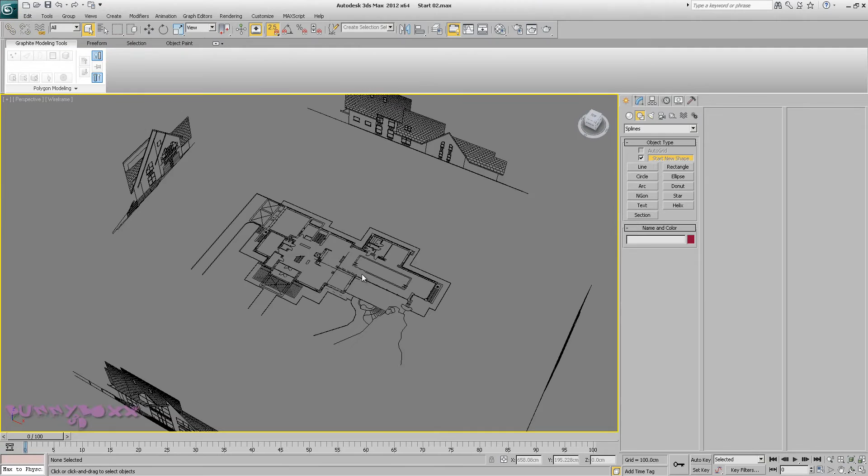So what we're going to do is go to the top view, and we're going to work through this in particular sections so we don't get too overwhelmed. I think we'll start down here, do the outside of this, and take it from there.

So we want to go to the line tool, making sure we have corner selected for both the initial type and the drag type, and we want 2.5 in the snaps toggle. How I do this is click and hold and select which one you want, making sure we have vertex selected.

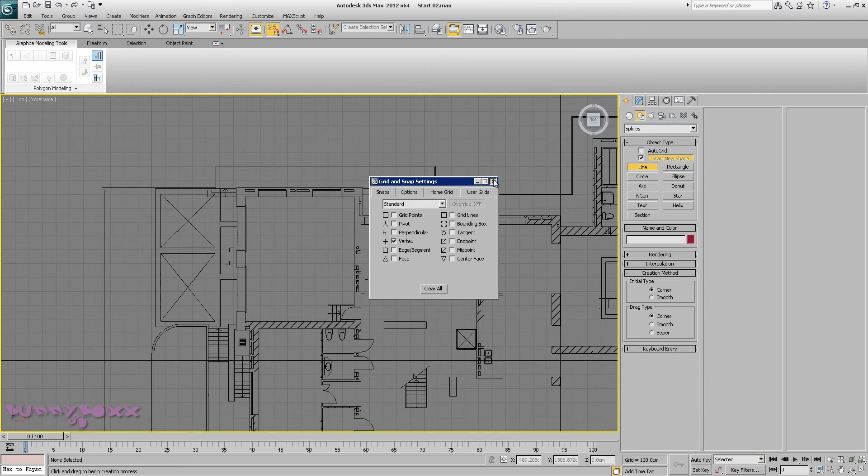Press S to turn on snaps, and we'll get this guy right on the end there to there. Now press the I key to center your view on your icon, and we'll go to here and across to here.

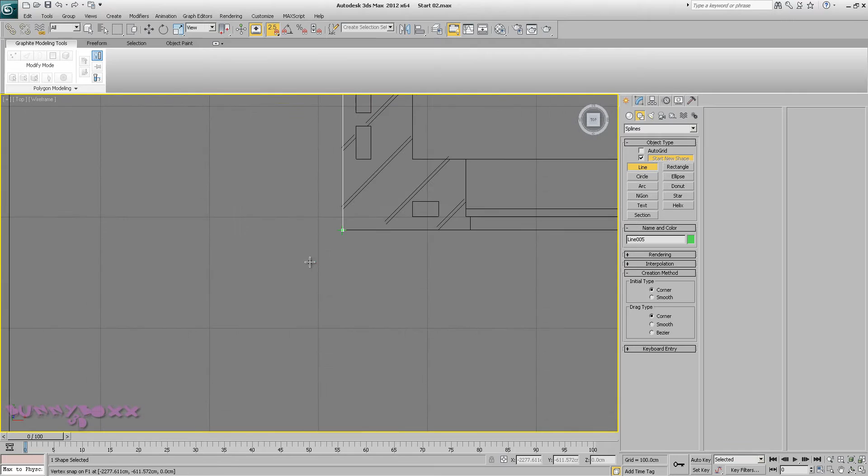Oops, I pressed the wrong button there. That's fine, we can just attach these as we go.

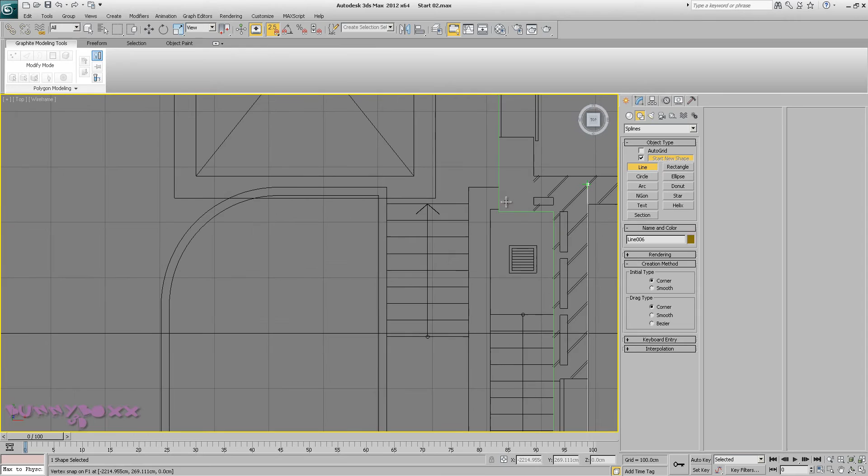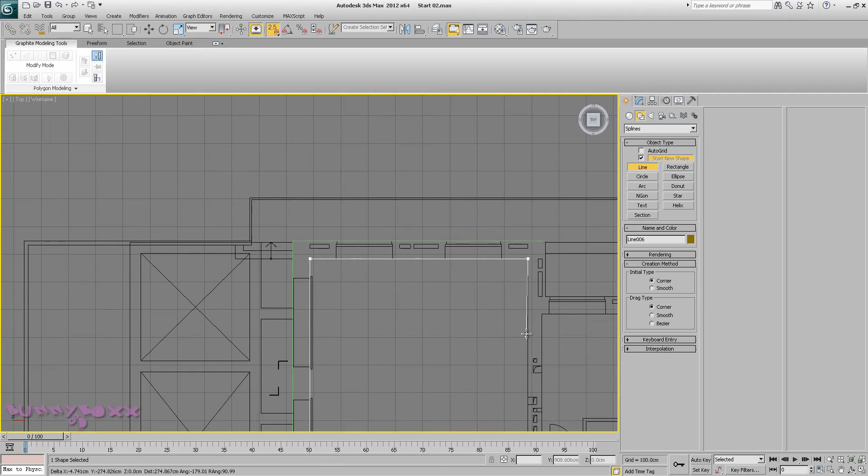Now this guy here, hold down shift and we'll just drag up to this point and snap to here, and snap to here, and hold down shift so we get a down direction, and we'll snap to this point, and snap to this point, and finally we'll go all the way to the top.

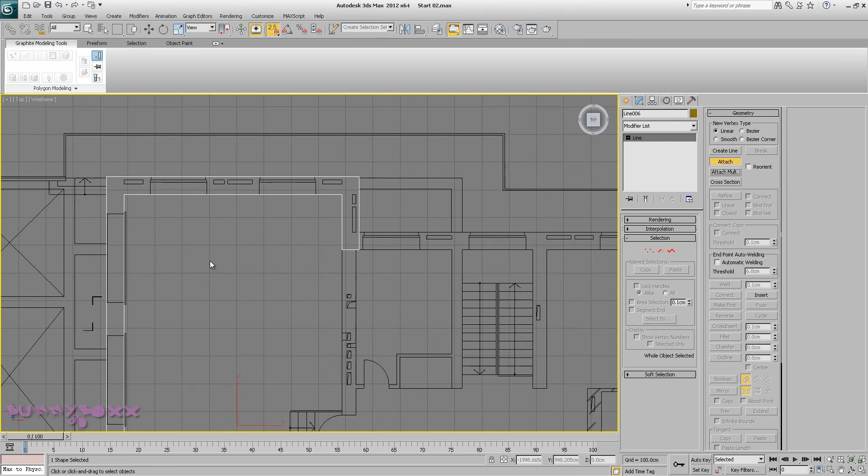Right click, and I just want to attach - attach multi - and we want line 5, and attach. We'll go into vert mode here, and looking at this, I'm just going to bring these guys up to here with my snap still turned on, and just double checking.

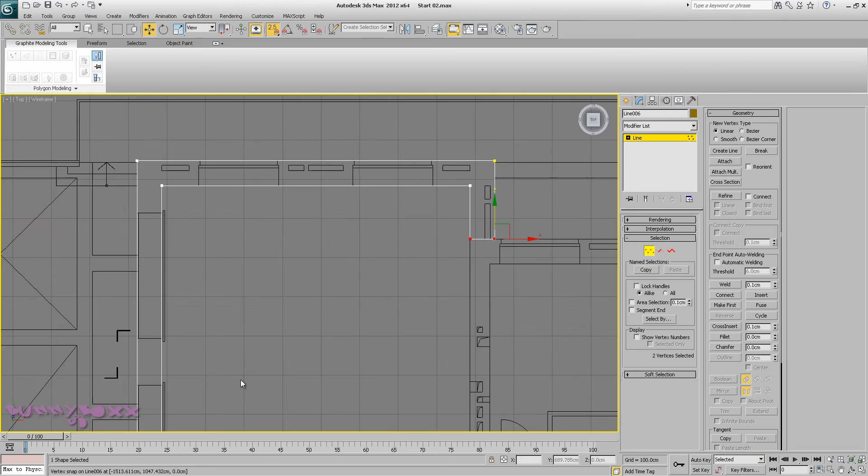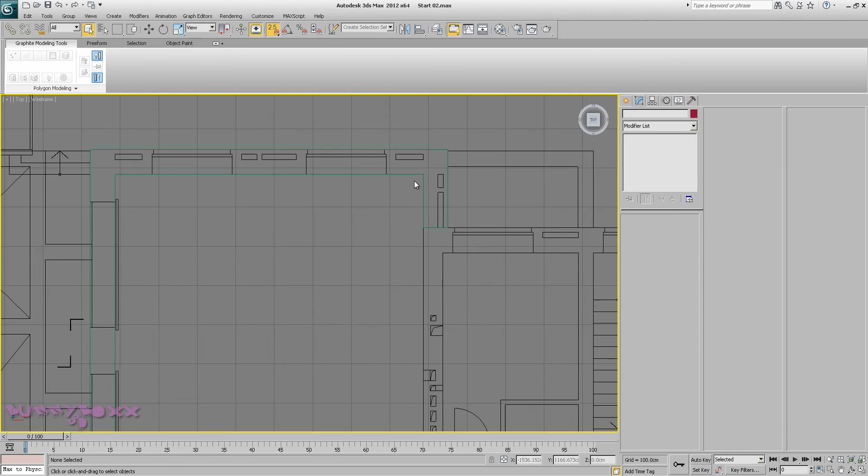Okay, now I just want to change the colour of this to a green, so it's easier to see.

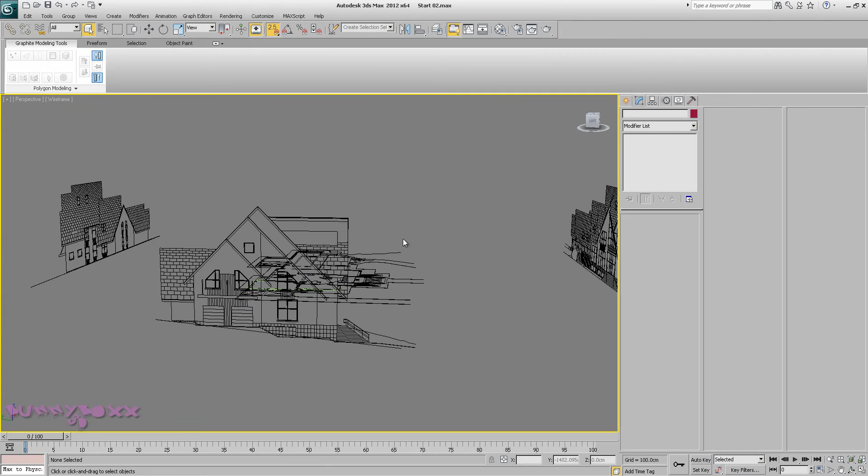And I want to go to perspective view, and what we want to do is hide this elevation view, and we'll go to the left. Okay, let's make sure we have our thing selected first - line 6.

Going to left view, and we want to add the extrude modifier, and match this with the highest point.

So I think if we go to the front, let's hide this guy, and we'll go to the front and bring this all the way up. It doesn't have to be perfect at this moment in time, so we'll just bring it slightly above.

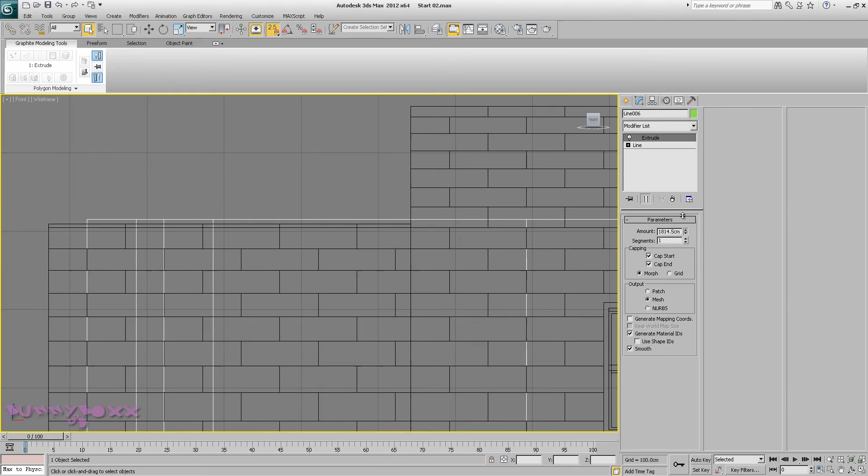And let's go shaded. I'm going to change this colour because that's better.

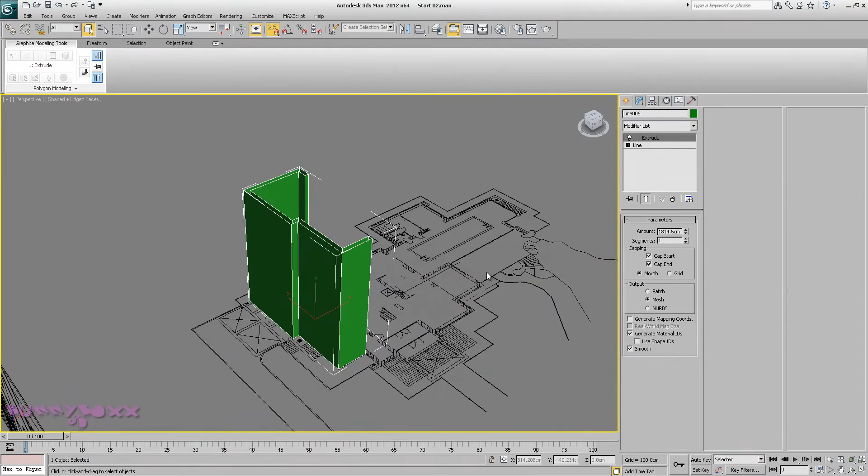So we'll go to our left view and let's turn on a wireframe. We want to slice this guy now, so make sure you have him selected, and we're going to go to the slice modifier. We're going to be using a lot of modifiers, I think, in this project.

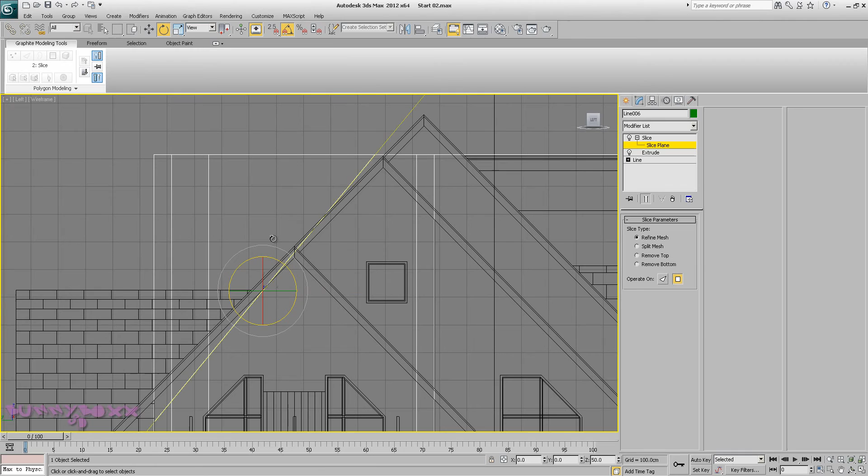So we'll select the slice plane, and we can bring up and move this any way we want to. Let's move this guy around about here. We want to rotate, so we'll angle snap, and bring that guy across here, like so.

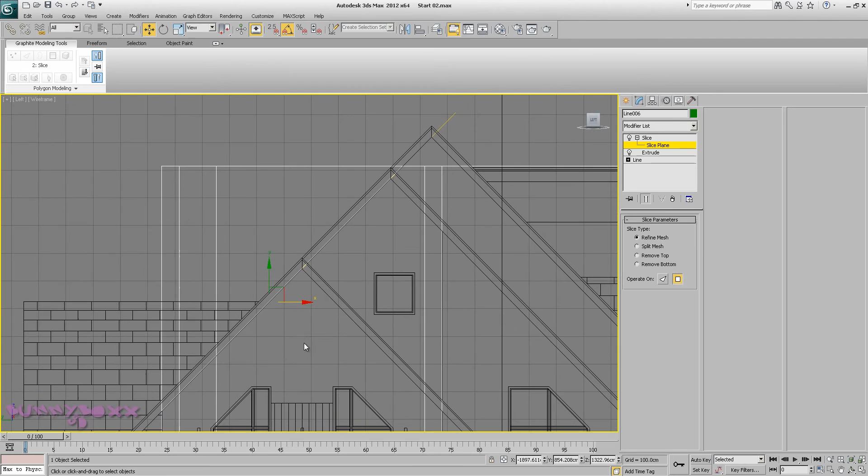And we'll select remove from the top, and it automatically cuts off the top there. So we want to copy and paste.

Making sure it's on top, press 1 to activate it, and we're just going to rotate - let's undo that, rotate first. Rotate another 90 degrees, and we just want to bring this across to, let's see, okay, perspective view, let's check this and go to shaded.

Okay, perfect, and we can convert this to editable poly. Let's have a look at this colour. Okay, let's close this bad boy up.

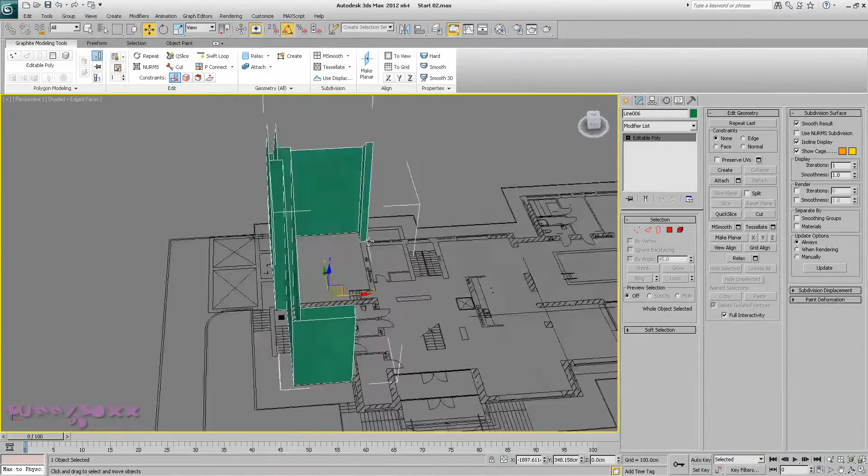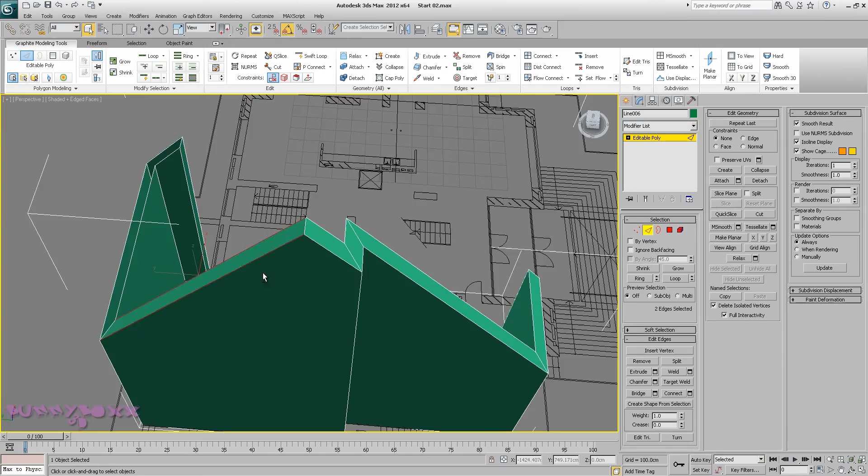So if we click on edge, let's select this guy and this guy and bridge. And bridge, bridge - you can also right click. Well, I did have it in my menu icon there, but I guess not. Bridge. And bridge.

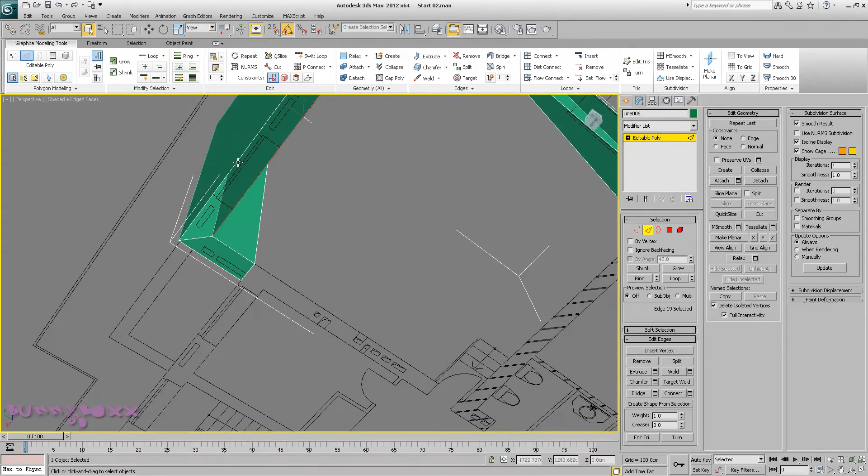Okay, looks like we need to do the bottom. Dun, dun, dun. Alright, this guy, this guy, and this guy. Okay, so that is nice and closed.

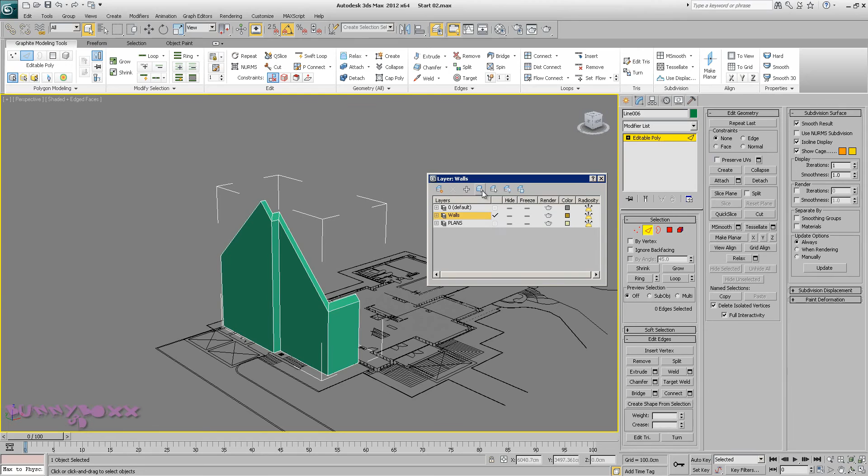So let's manage our layers here for a quick second. I think we'll create a new layer, and this one we shall call walls, and add selected objects to the highlighted layer. Okay, so let's make sure this is selected, and we'll close that off.

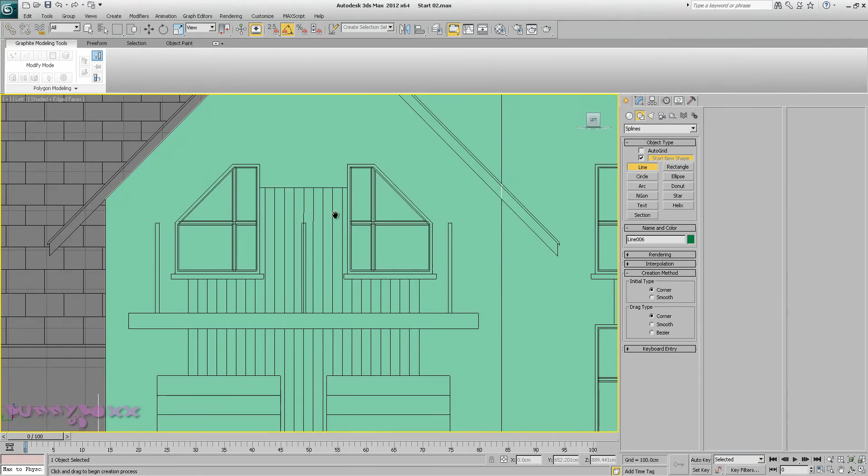And if we go to the left view, let's cut the holes from the windows. So what we're going to do is create the line tool and turn on our snaps. 2.5 is still good.

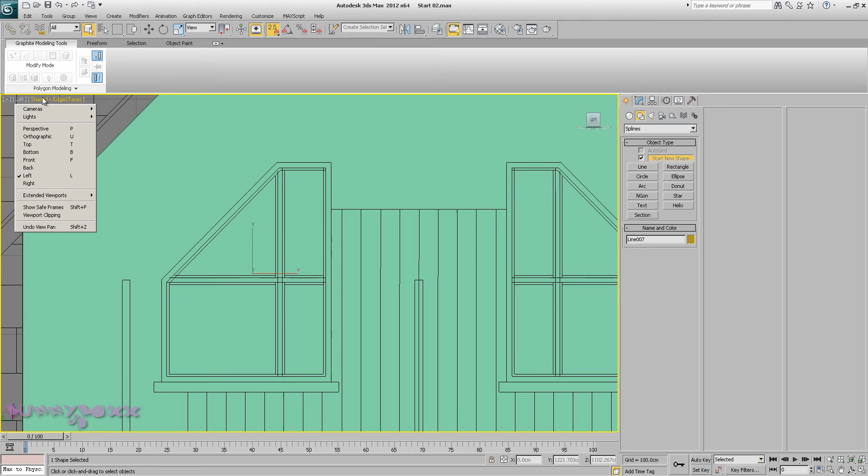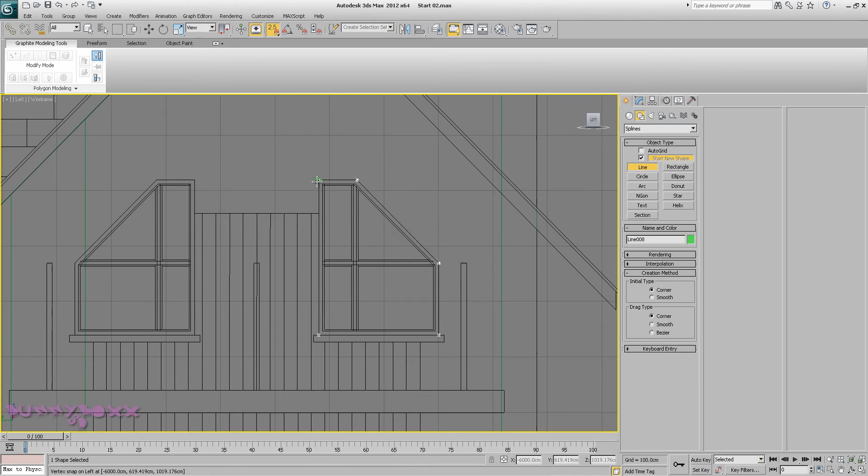So left, let's just put on a wireframe here, and we'll go over to here. Close that guy, and we'll do the garage doors. Yes. Okay, I'll right click to end the tool, perspective view.

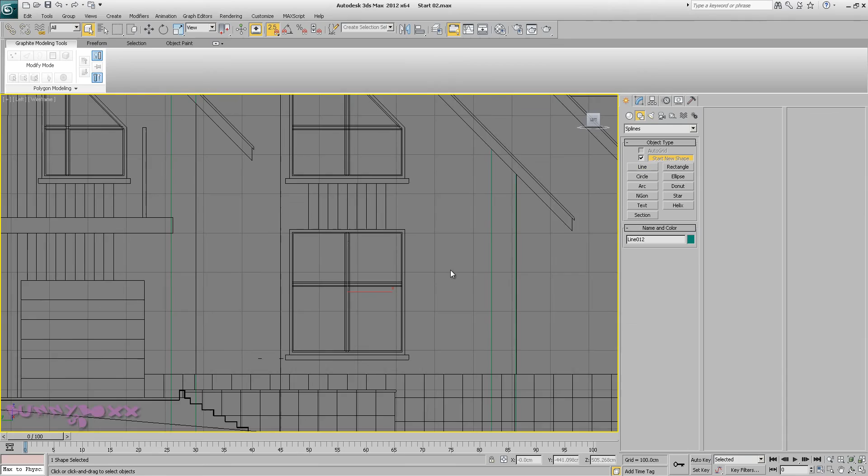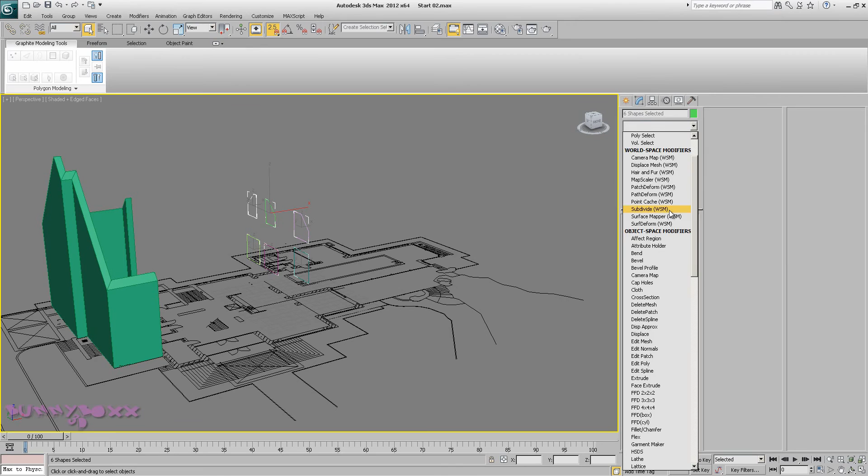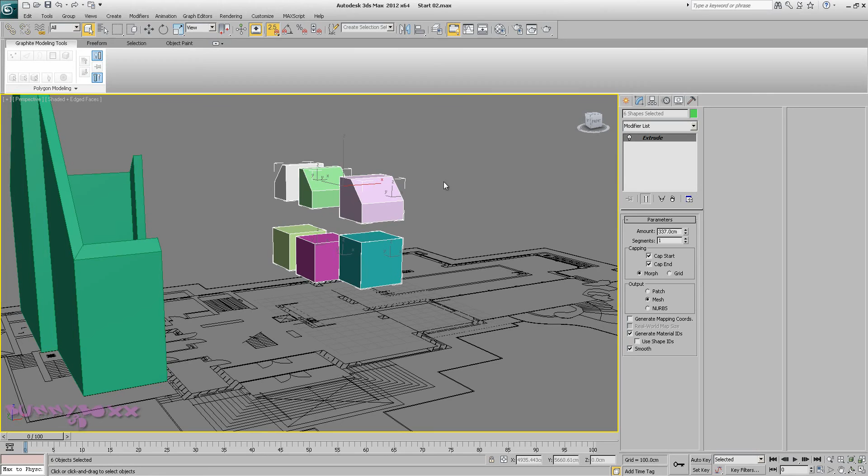I'm going to shade it here, and we'll select all those guys, and go to our modifier list and the extrude modifier. So I'm just going to reduce these - you can go faster by holding down Control. And there we go, just select these. There we go, I want to make this blue as well.

There we go, and we'll just bring these across. Turn off your snaps tool.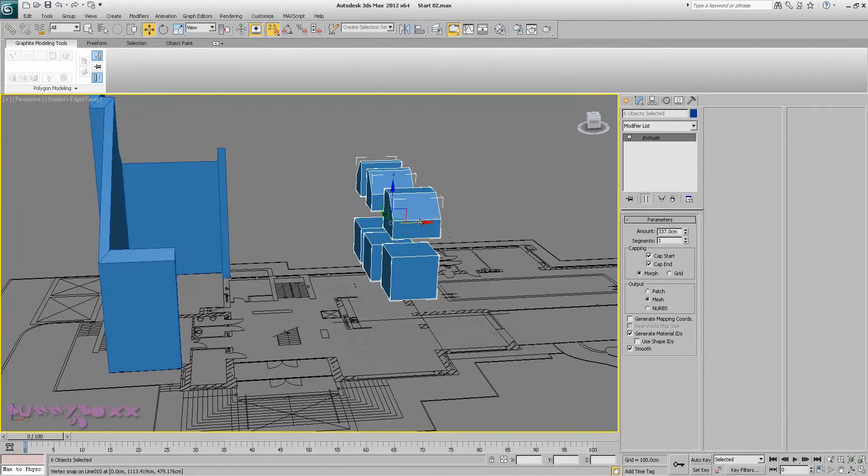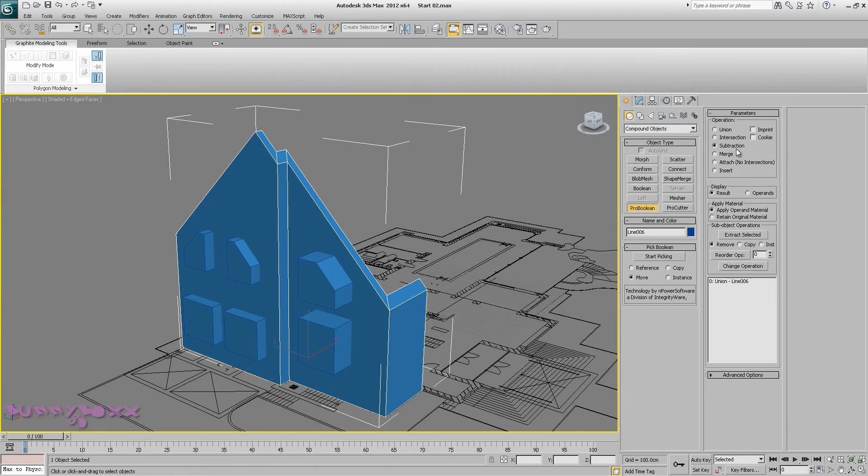Okay, so now, making sure we have the wall selected, and making sure that these objects we just created are poking through both ends, we'll go to the Create tab, down to Compound Objects, and select Pro Boolean. We want Subtraction, click Start Picking, and select each one of these, then right click to end the tool.

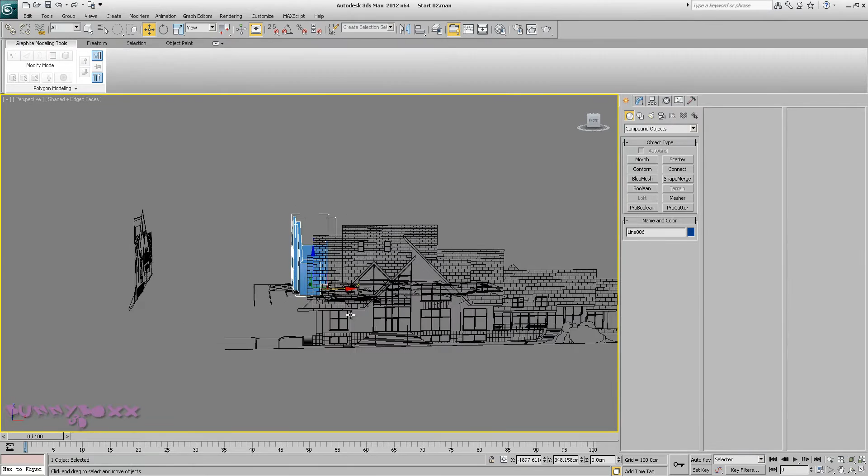And we have our windows, and if I'm not mistaken we have a window at the front here. So go to the front view, just checking something here for a second.

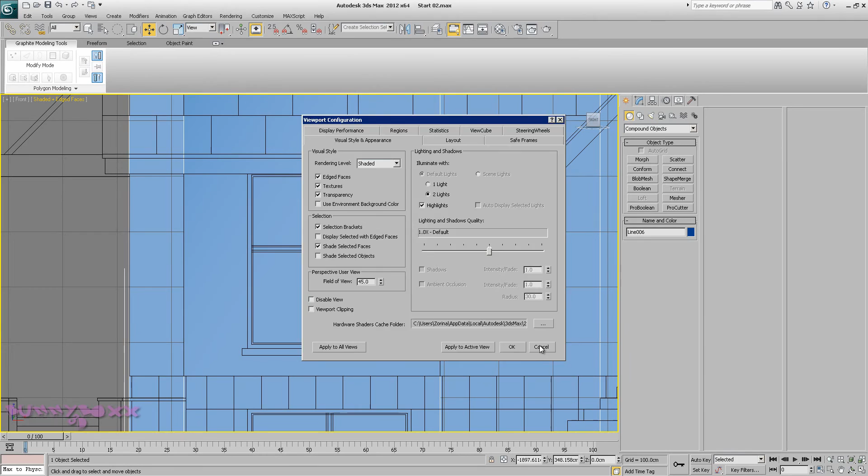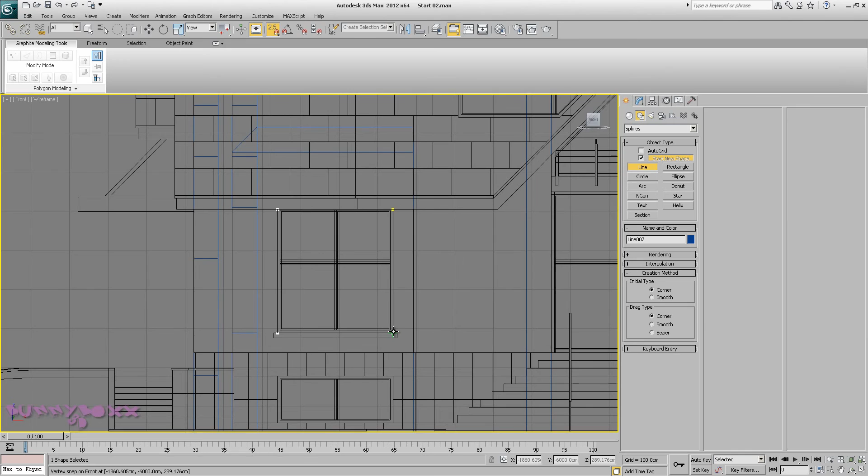We'll turn on wireframe, go to our line tool again, turn on snaps, and just trace across. Right click, go to perspective, turn back to shaded.

I want to select the extrude modifier, bring this through, select our piece again. Before we actually pro-boolean this, I'm going to go back to our front view.

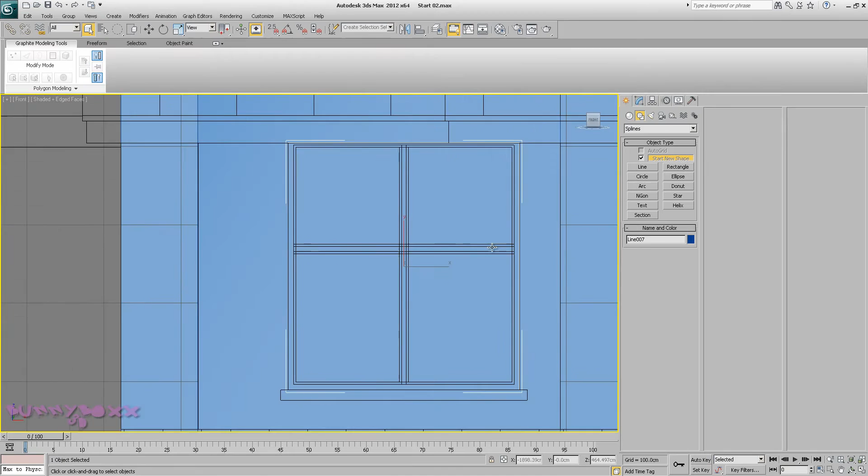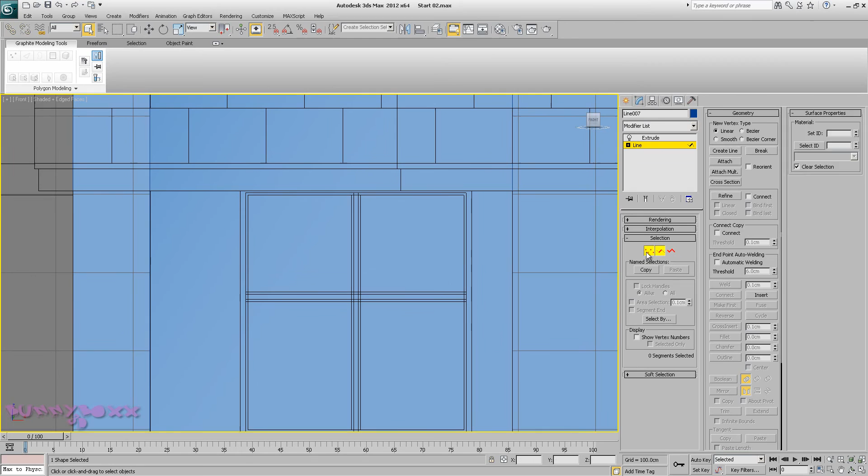Go to our line tool, wireframe, grab these two, and just bring these up a bit. I'm going to snap it to this corner here because it didn't look right—there's not much of a frame.

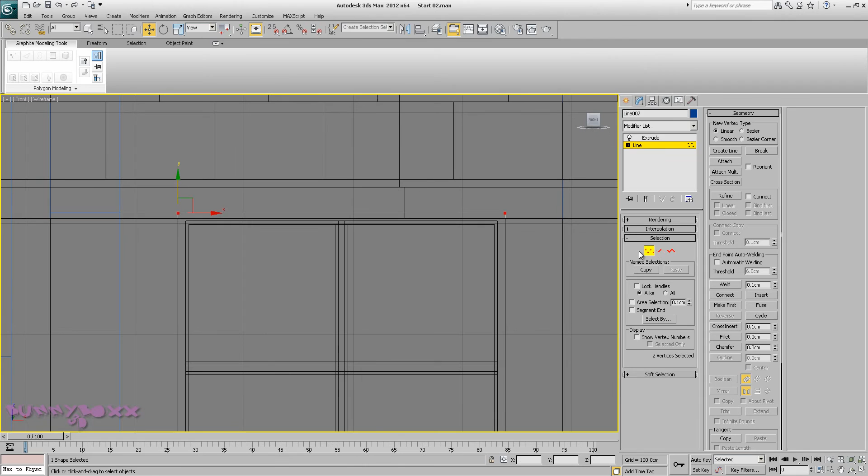Okay, we'll go back to our extrude, then back to our perspective. Now back to our pro-boolean—should still be active—click start picking, and select that piece there.

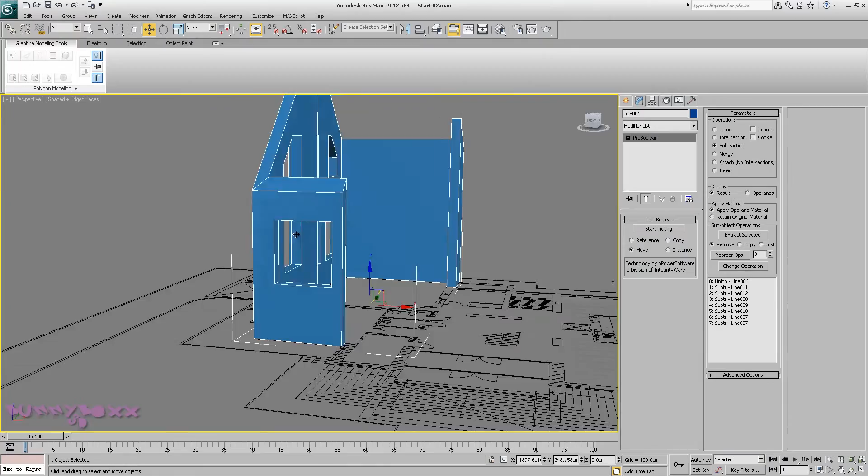So let's unhide the back, and we want to hide the front. Press B for back—sorry, bottom—go perspective. Okay, it's a back.

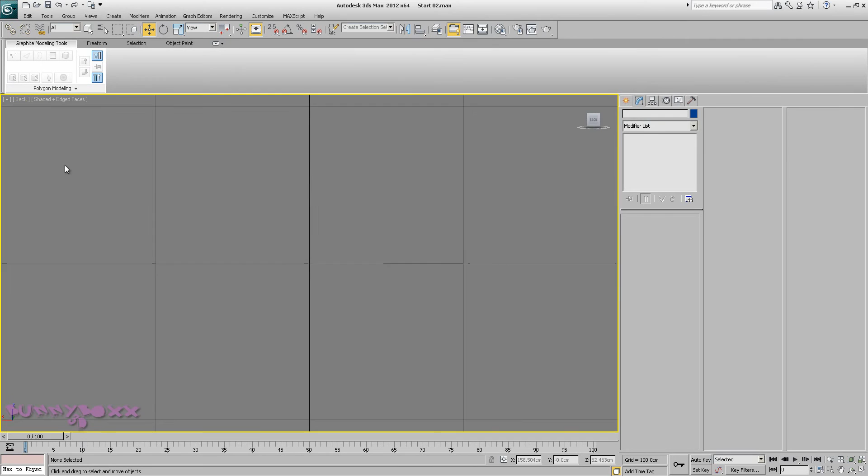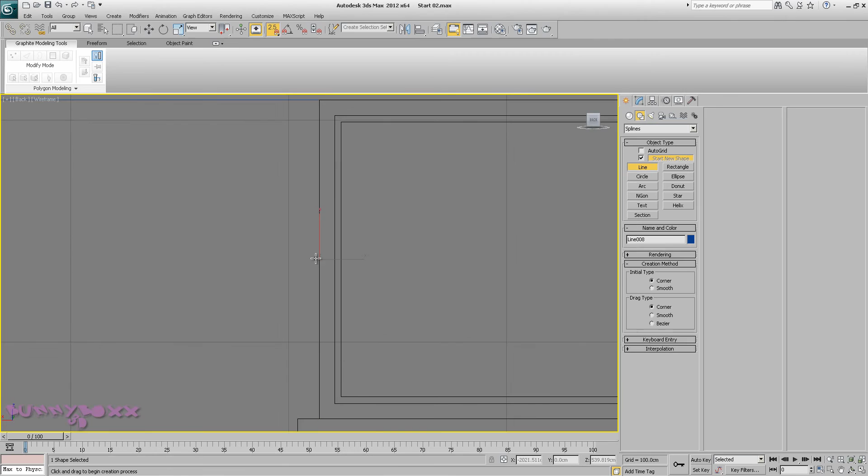And we'll do the same thing. Turn on snaps. Zoom in, and it's over here. Zoom in.

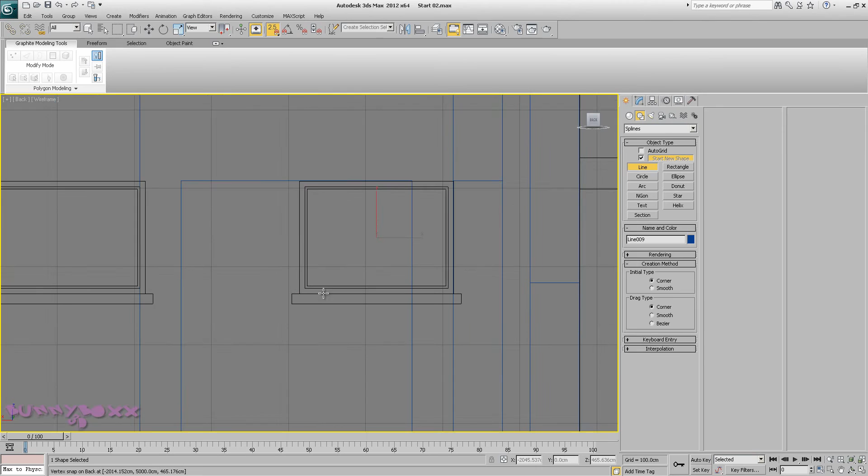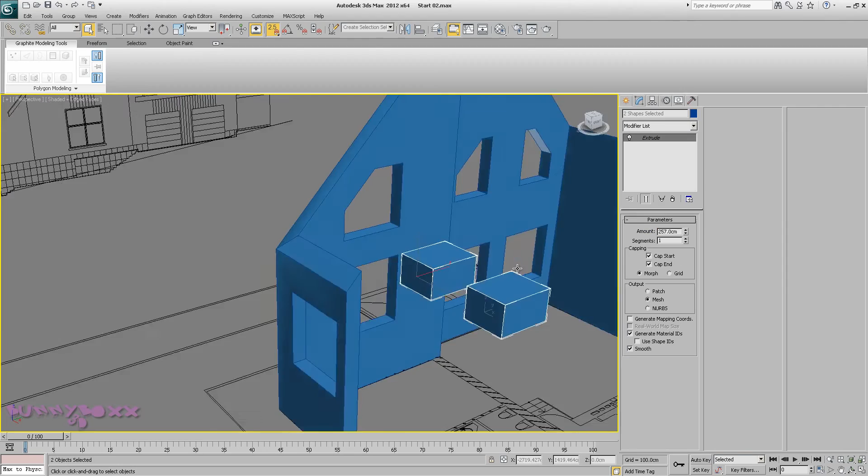Select both these guys, and we want to do an extrude. Start picking. Let's frame up—there we go.

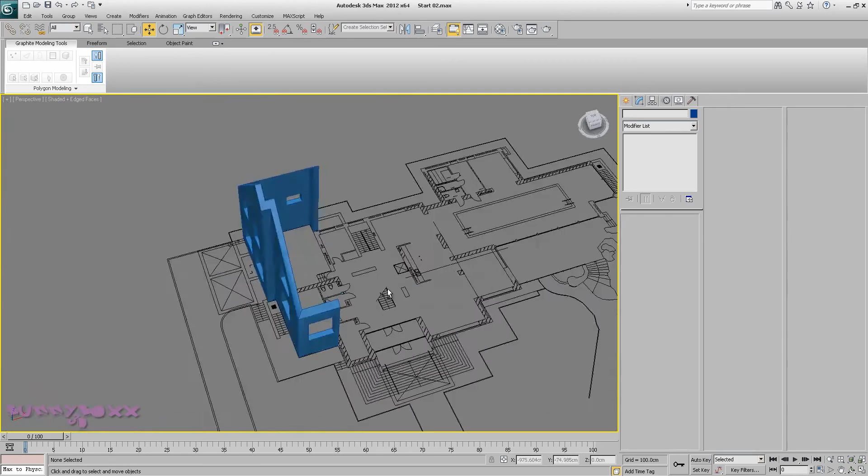So at the moment it's looking pretty good. Let's delete that random line. Okay, let's check our time here. We can do this little bit down here, I guess.

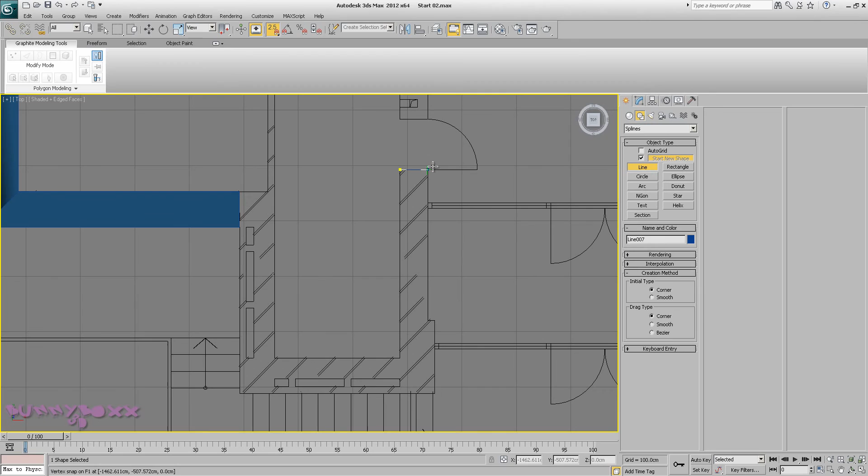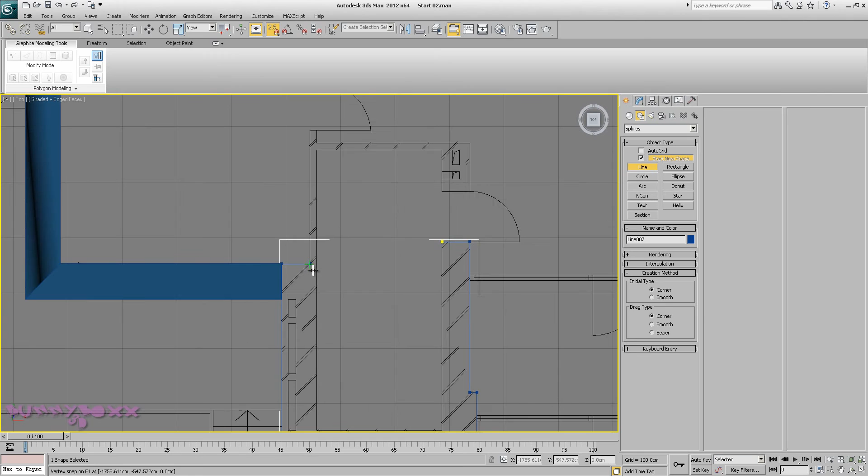So do the same thing with the line tool, turn on our snaps. Let's zoom in on this guy. We can just bring that across afterwards.

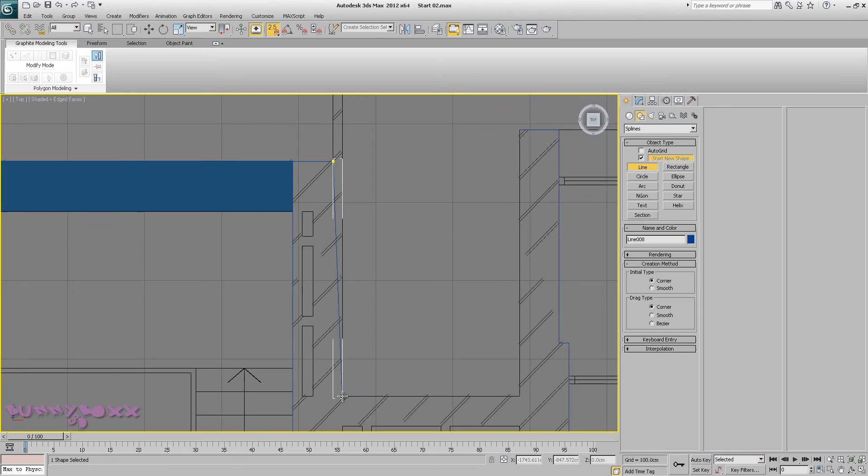Okay, so select—let's attach multi, and we want line 7. Enter verts, turn on our snaps, and just snap this in the X. Just double checking.

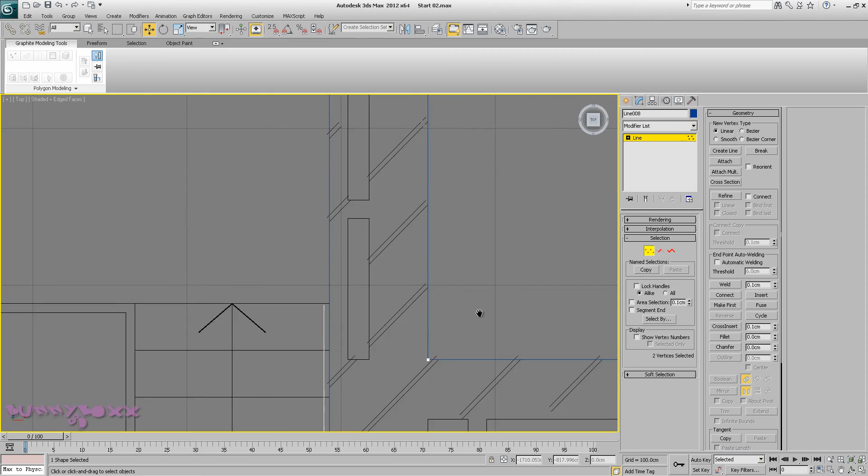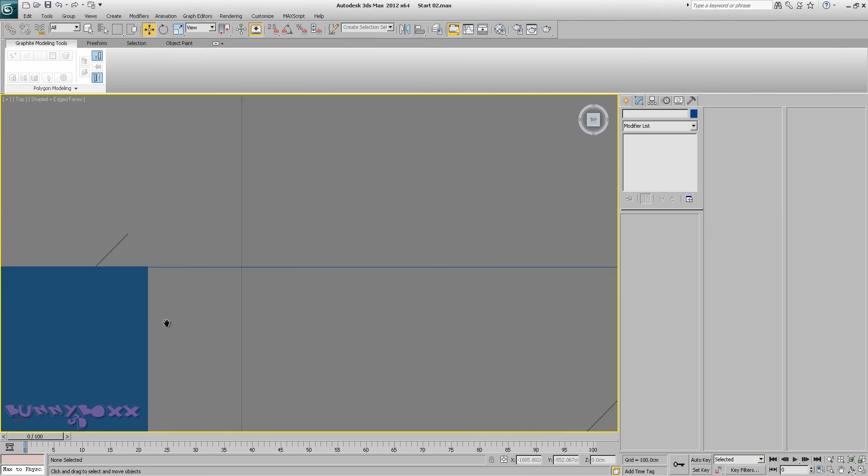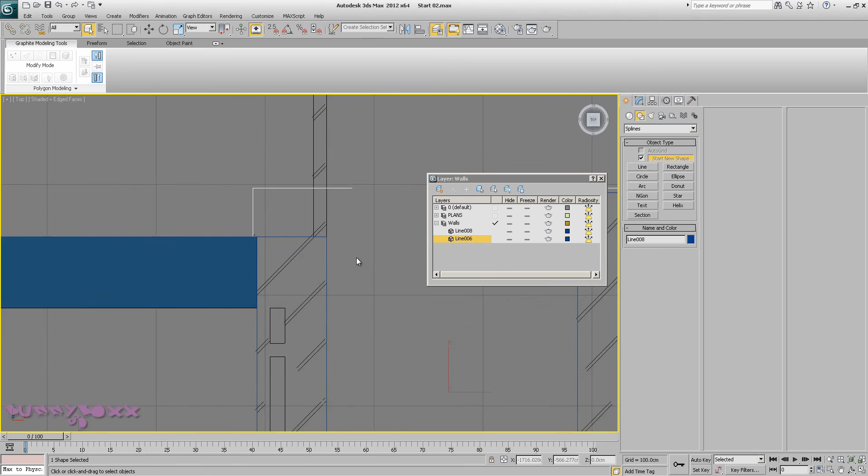Just want to match line 6, grab these points, turn on snaps, and just bring it to there. Okay, I'm going to be OCD on that particular point, so I'm just going to select line.

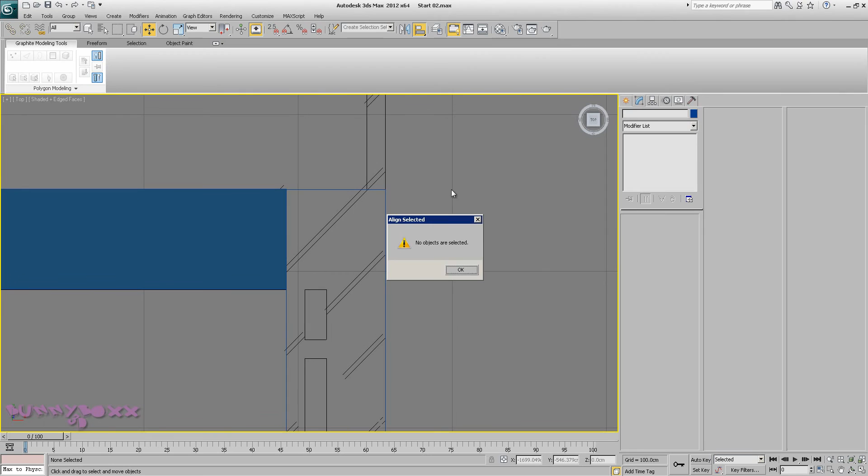Line 6. Where are you? There we go.

And go to our front view, then go to our extrude modifier, hold down Control, and just bring that up slightly above.

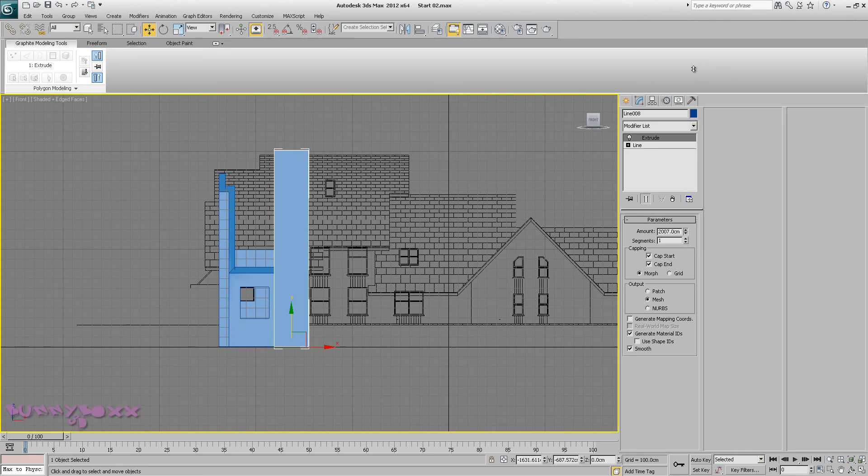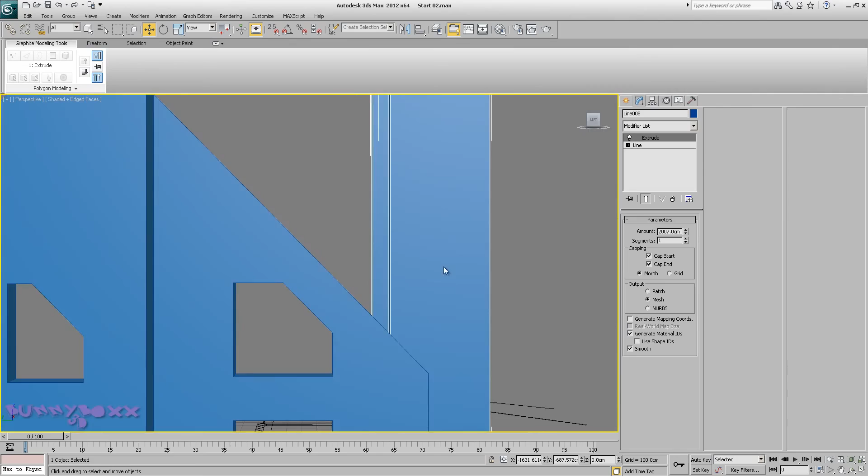Okay, and check the left side. It looks like the edge of this wall comes out a bit more. So what we're going to do is go to our line tool here.

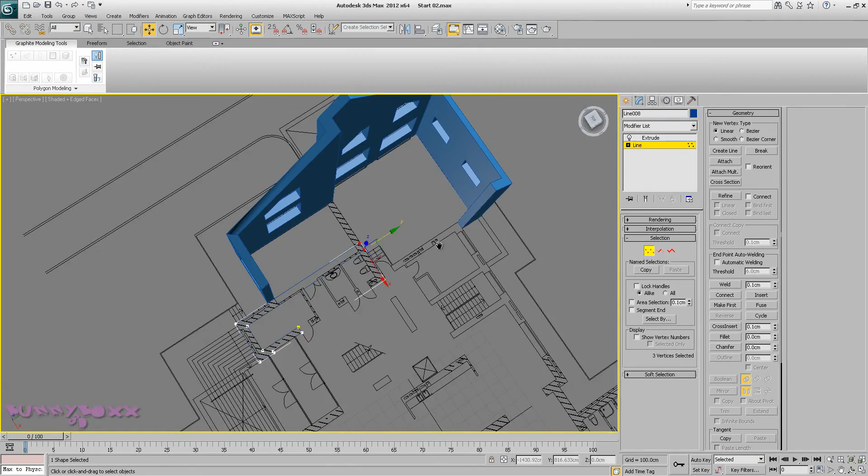And we'll grab these two, then again grab these two, and just bring these out. Let's turn on our snaps, and we'll snap to this in the Y.

Let's go to our left view, go back to our extrude, and turn off snaps. Actually, I think if we do turn on snaps, we can snap.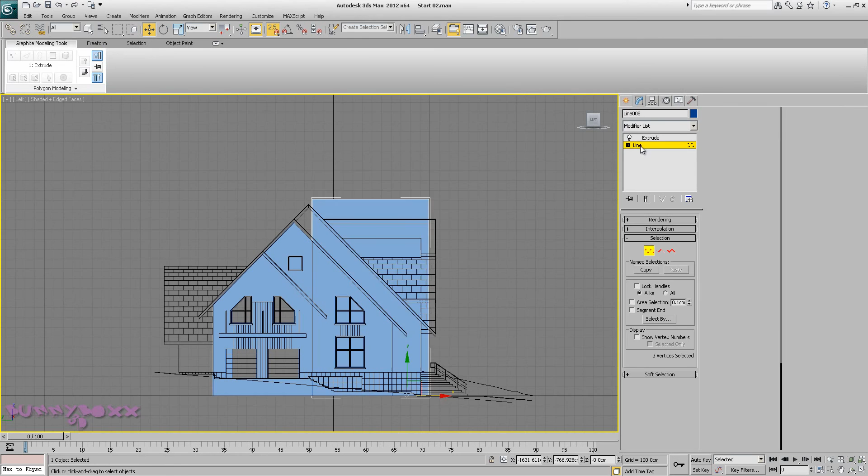Go back to line, go to the top view. And with these two selected, go back to the left view and snap these guys in the X to that point there, then turn on extrude. Okay, looks good.

Let's show end result. I think we'll just bring it out to here to be safe.

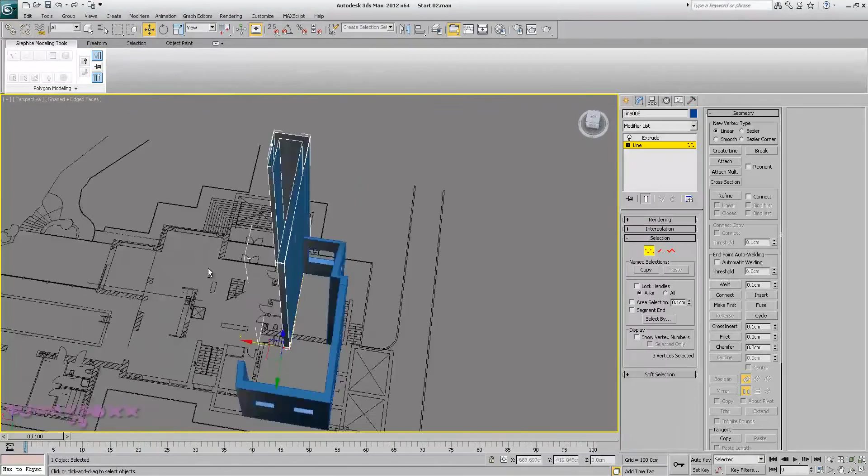So do the same process as before, left view, and let's turn on our wireframe here, and that's the slice tool. Press 1 to activate.

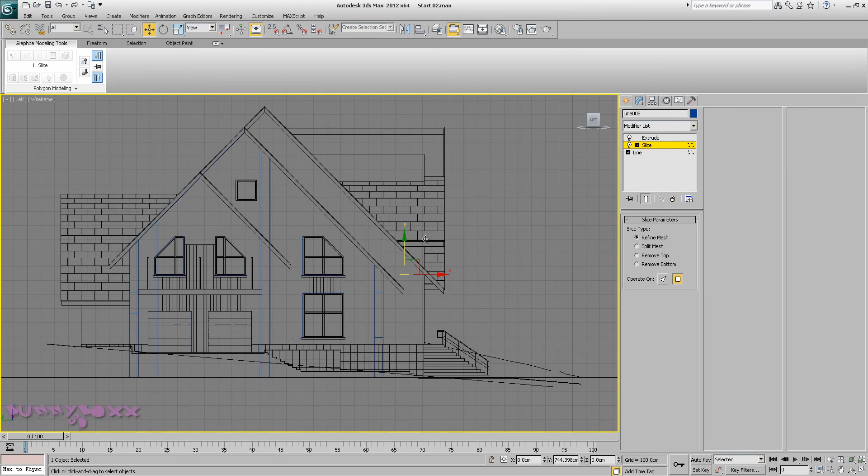And we're just going to bring—let's undo that. Okay, slice tool, making sure it's the top one. Press 1 to activate. We can just bring this up.

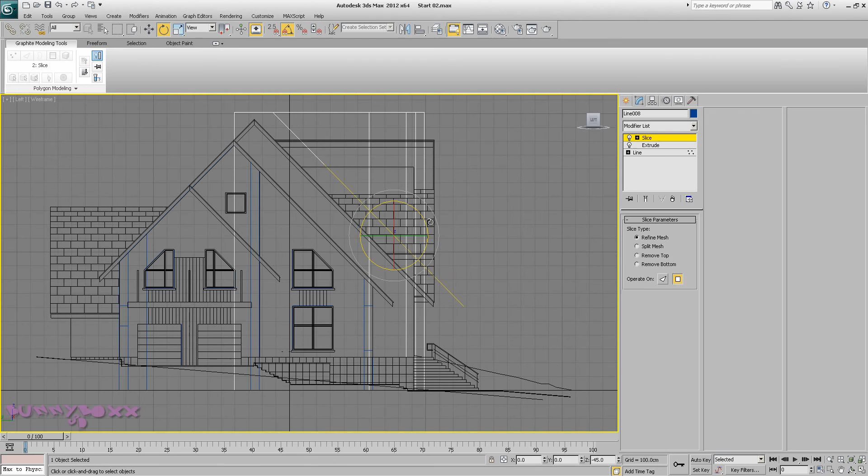And we can rotate 45 degrees, and we'll put this, and remove top, and I want to copy and paste the modifier.

Press 1, and rotate -90 degrees this way, and then we'll move this across, like so, and remove top.

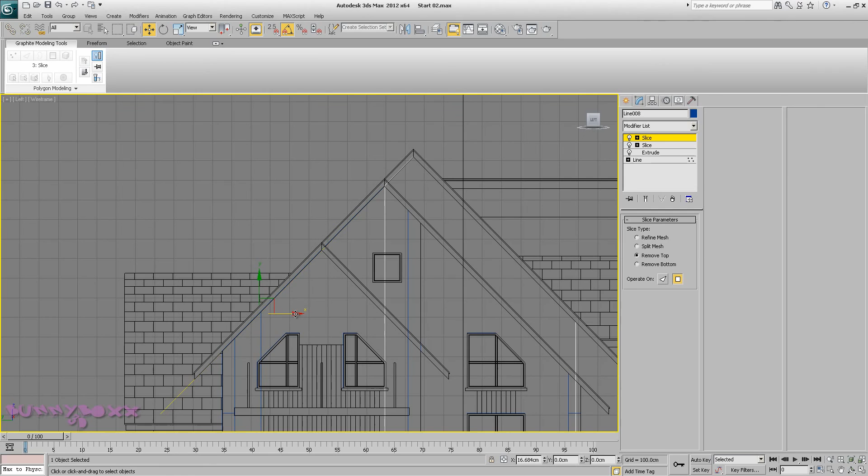Let's go to our perspective view, turn on shaded. Okay, so convert to editable poly.

Just the same process as before—grab these, bridge. These and bridge. 1, 2, 3, 4, okay.

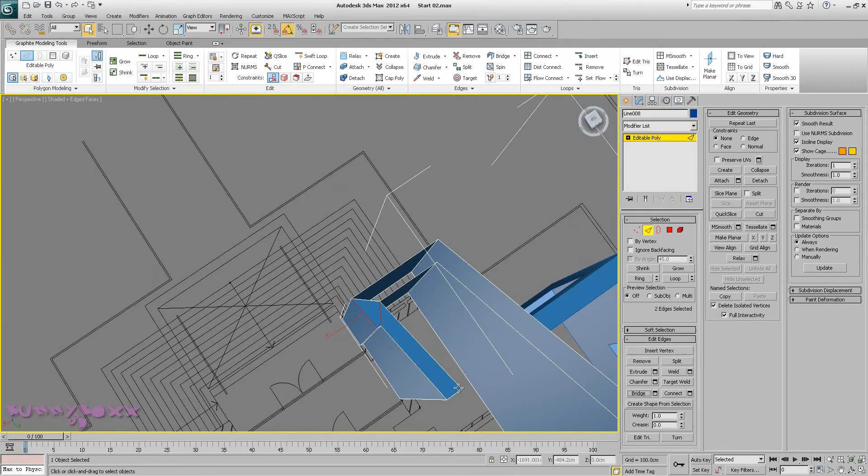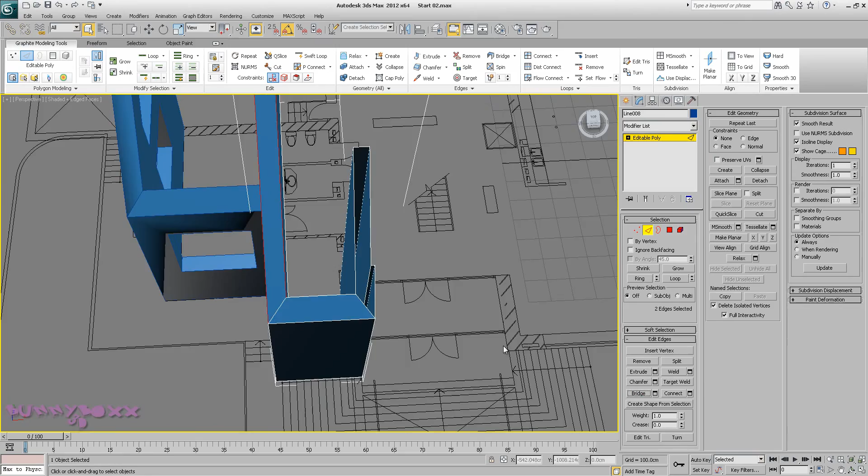Actually, in saying that, we'll just grab these two first, and bridge. I'll show you what I'm going to do. I shall show you—okay, so we'll just grab this ring and cap.

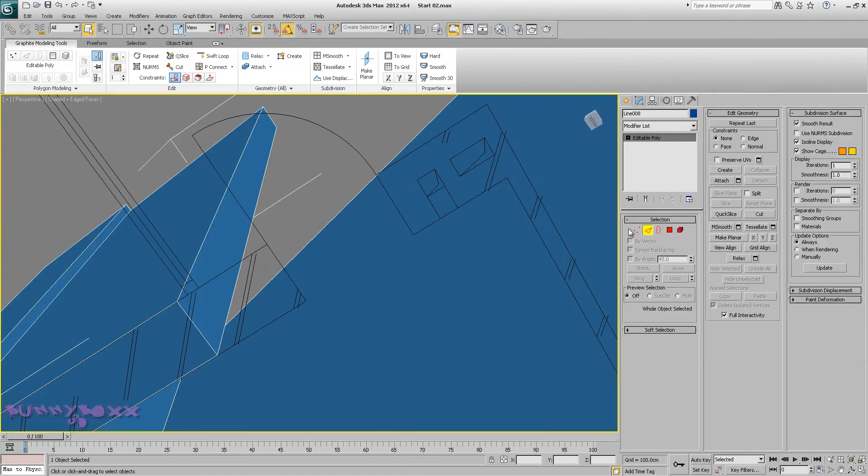Let me sort this out. Bridge. Bridge. Now I think we should be able to select just that outline.

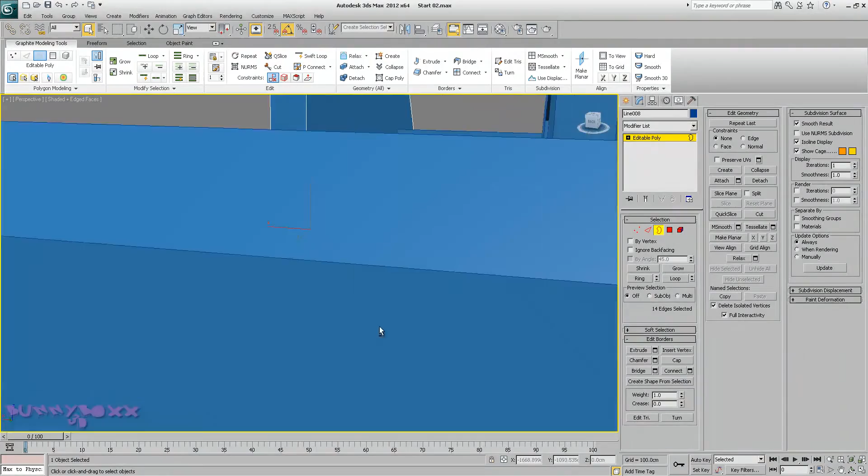I thought as much—we have 3 verts here. So what I'm going to do is just do a quick weld. So I should have 2, 2. Okay, I might have to do this side first as well.

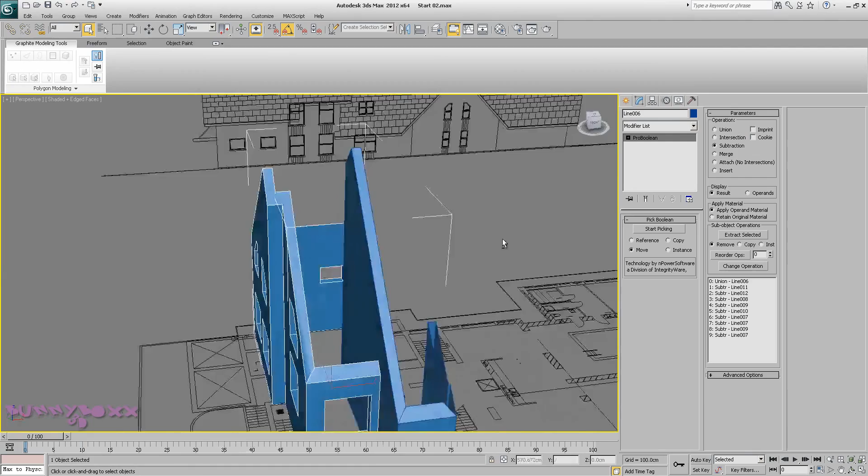Right, we'll do that soon. Let me just fix this guy first. So now we should be able to—I just want to show you a different way of doing this. And cap. And select this one. And cap.

Okay, and just want to connect these two.

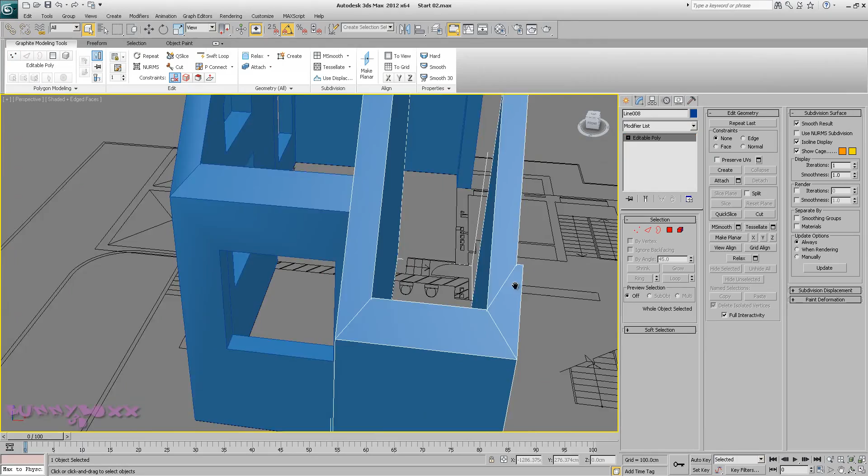Check the time—okay, we'll leave it half an hour. In the next lesson we shall continue the process. Enjoy.